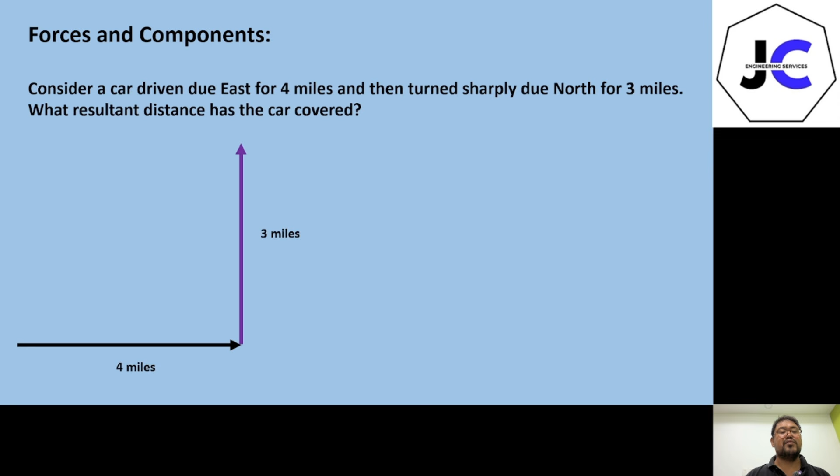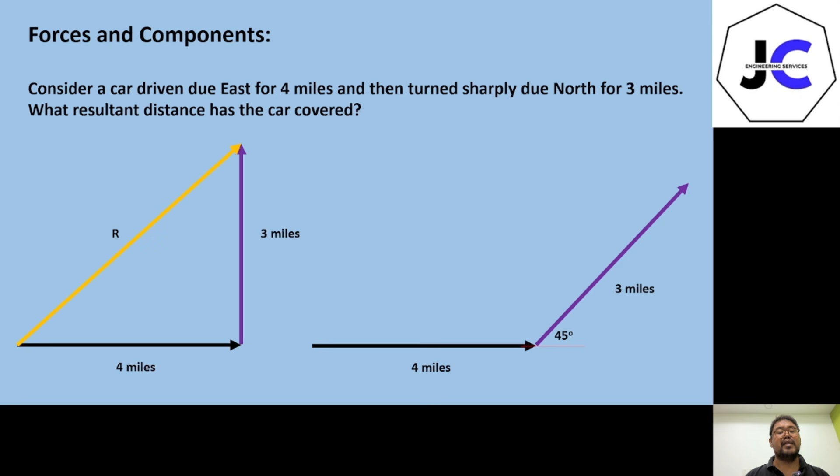So the resultant, like in the previous module, is simply the sum of the two vectors. So we have R. If our 3 miles is not purely directed north or upward, then that becomes our resultant, let's say 45 degrees with respect to the horizontal. So that becomes our resultant.

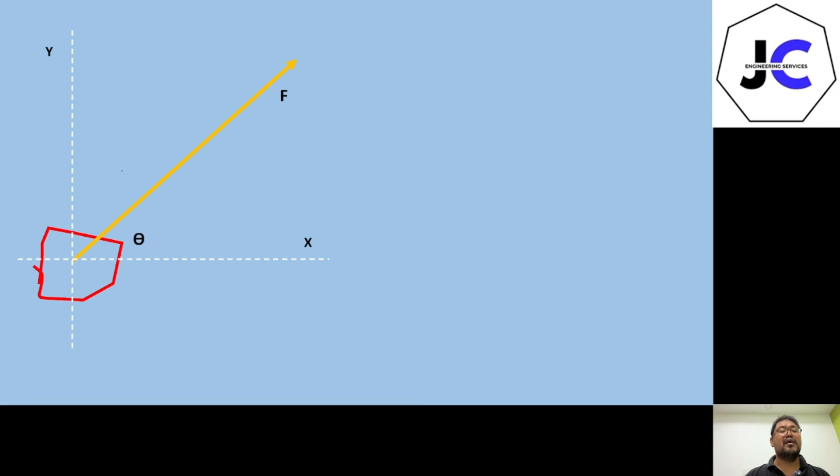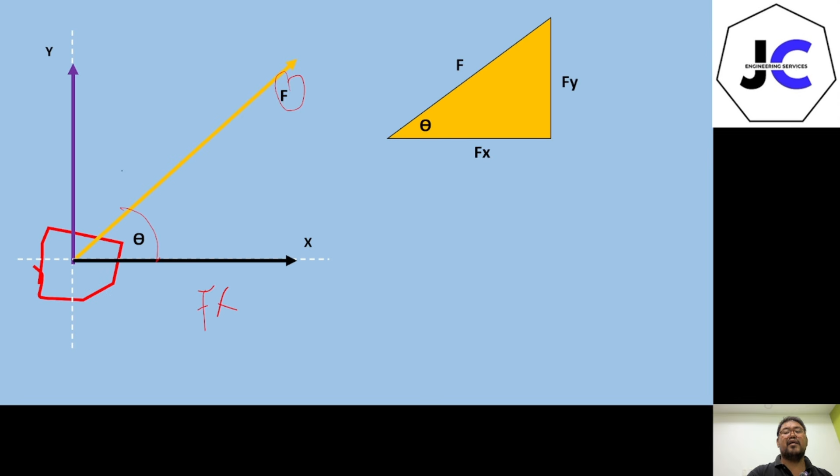Next, you have your body, this is your resultant F. This is your resultant, this is your angle. The purple line and this one are your components, so we're going to call this F sub X and F sub Y. If we form the yellow triangle, we can see it here.

Since it's a right triangle, sine theta equals F sub Y over F, opposite over hypotenuse, and by cross multiplying, F sub Y equals F sine theta. For F sub X, cosine theta equals F sub X over F, cross multiply, we have F cosine theta.

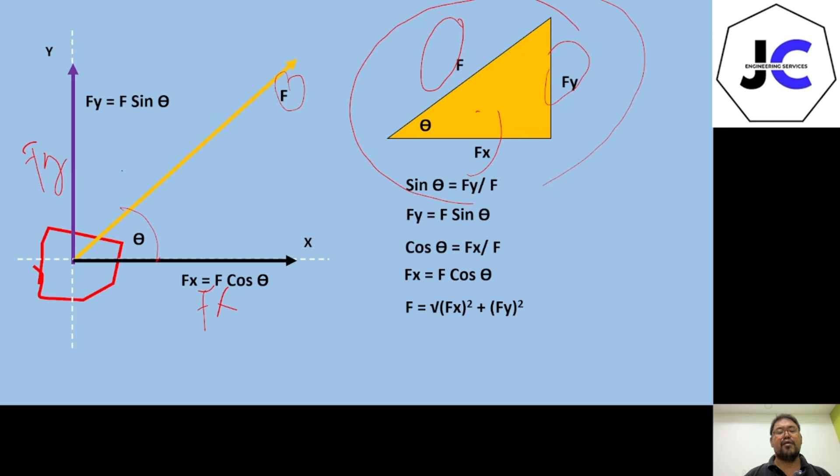Then for F, we're going to solve this since it's a right triangle, using the Pythagorean theorem. So we have square root of Fx squared plus Fy squared. Then for the angle, we have tangent theta equals F sub Y over F sub X.

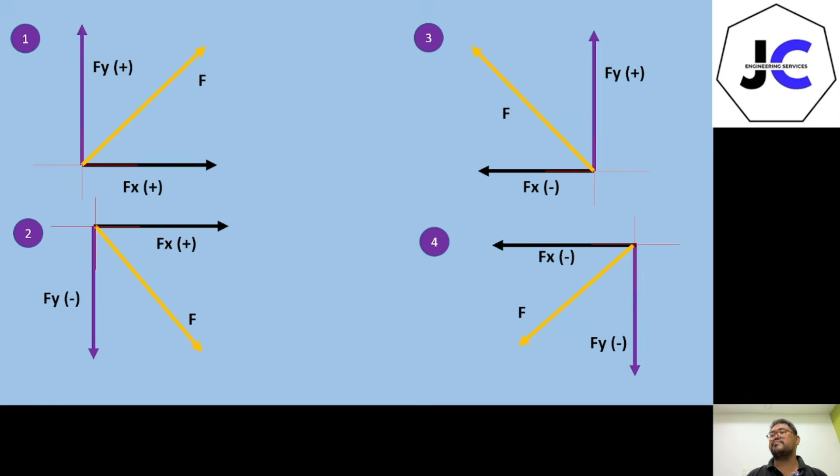Number 2, find the components of 300 pounds. This time, the angle is not given, but the slope is given. If the angle is not given and the slope is given, we're going to solve this using ratio and proportion. So by Pythagorean theorem, that is square root of 2 squared plus 3 squared, which is square root of 13.

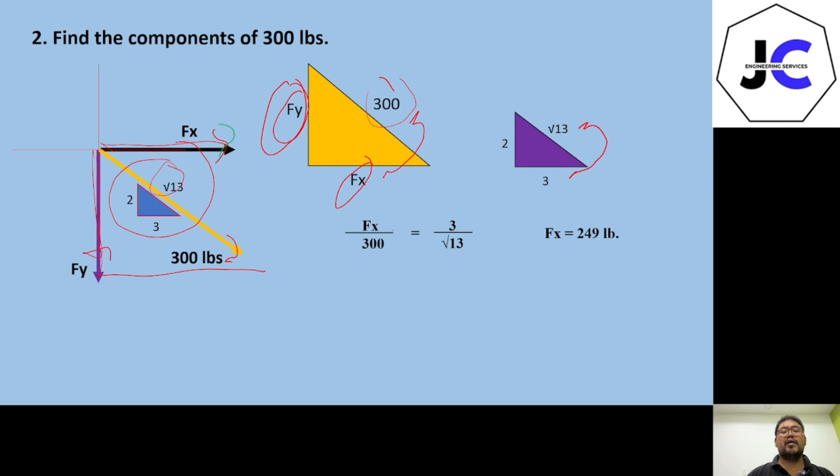This one is positive, going to the right. For f sub y, we have f sub y over 300 equals 2 over square root of 13. The sign is negative because f sub y is going down. So we get negative 166 pounds. So that's the answer.

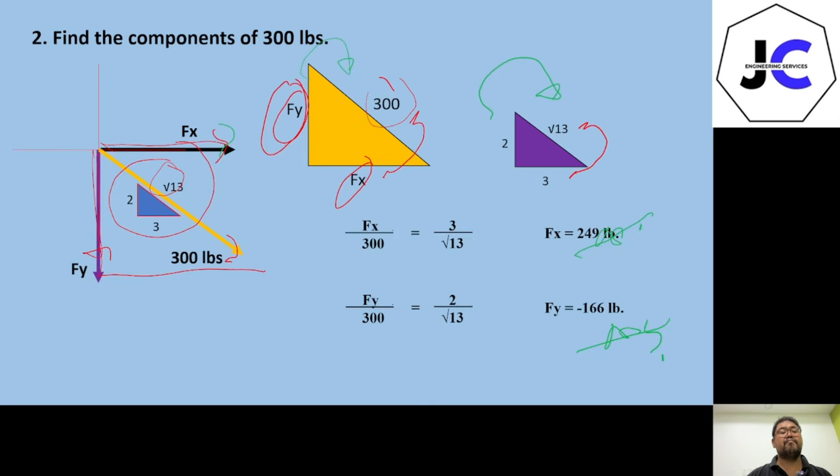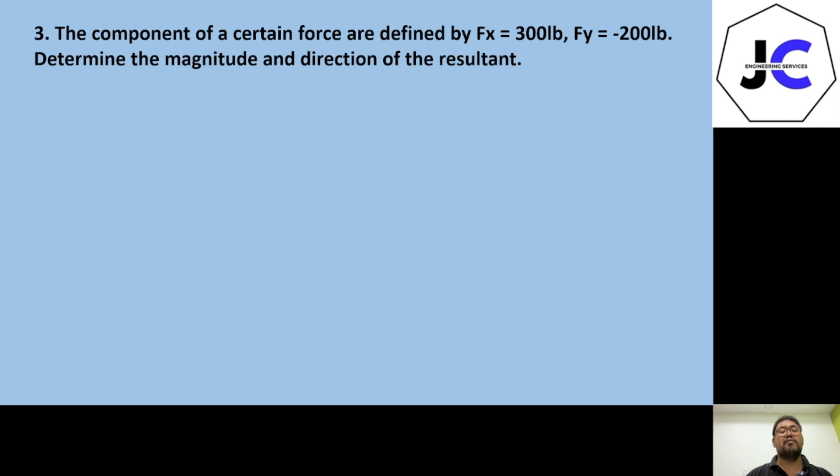Number 3. We have the components of a certain force defined by f sub x equals 300 pounds, f sub y equals minus 200 pounds. You are asked to determine the magnitude and direction of the resultant.

So magnitude and direction. We draw this with 300 and 200, then the angle. For R, we solve using Pythagorean theorem: square root of 300 squared plus 200 squared, giving us 361 pounds for the magnitude. For the direction, tangent theta equals 200 over 300, opposite over adjacent, so theta equals 33.69 degrees. So the resultant is 361 pounds at 33.69 degrees with respect to the horizontal. That answers number 3.

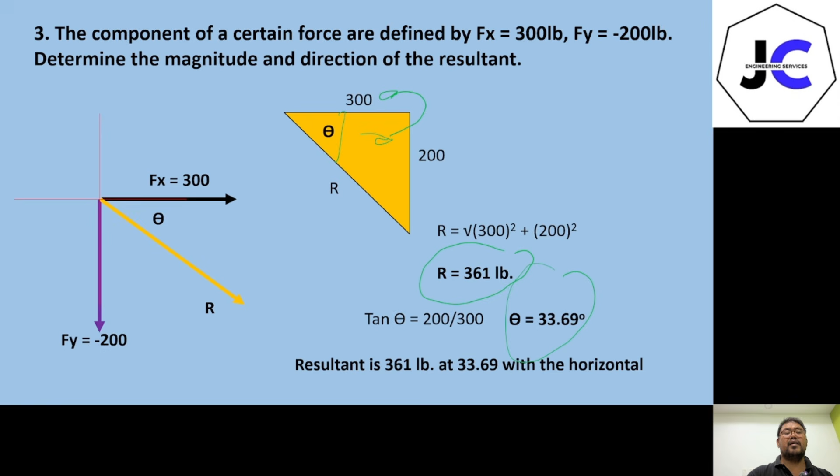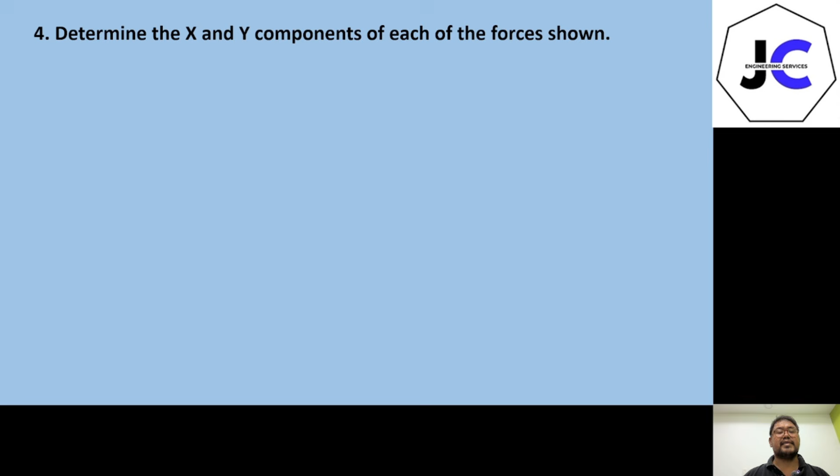Number 4, you're asked to determine the x and y components of each of the forces shown. You see there are three forces: F, P, and T. First, F. F is 390 pounds, the resultant, with components f sub x and f sub y. The slope is 5, 12, 13 by Pythagorean theorem, that is square root of 12 squared plus 5 squared.

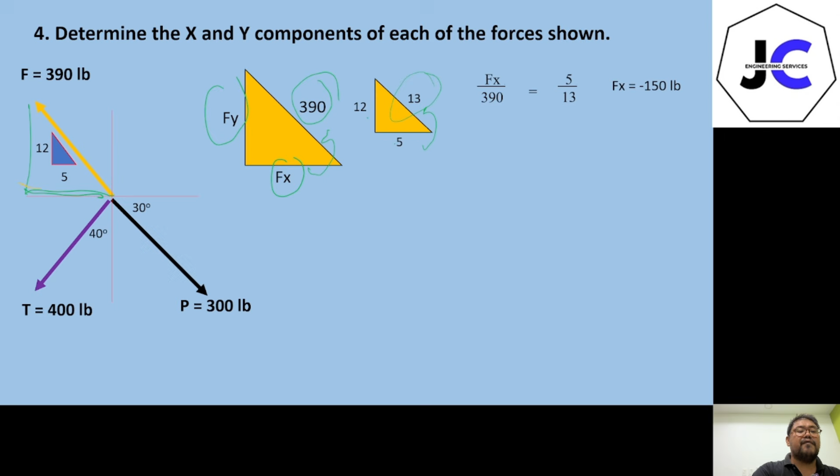Again, from the previous example, if the slope is given like this, we solve using ratio and proportion. So f sub x over 390 equals 5 over 13, giving us minus 150 pounds, minus because the component of F is going to the left. F sub y is going up, so f sub y is positive. F sub y over 390 equals 12 over 13, so f sub y is 360 pounds.

Next, solving for T. For T, the resultant is 400 pounds. Now for the components, f sub x is negative going to the left, and f sub y is negative going down. For this one, the angle is given.

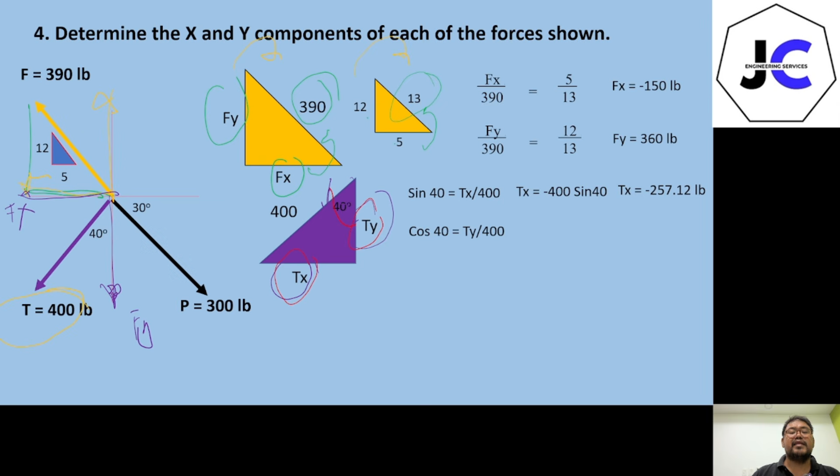The opposite side of the 40 degree angle is T sub X, so sine; the adjacent side is T sub Y, so cosine. So sine 40 equals T sub X over 400, giving T sub X equals minus 400 sine 40, or minus 257.12 pounds, negative going to the left. For T sub Y, cosine 40 equals T sub Y over 400, so T sub Y equals 400 cosine 40, negative going down, giving minus 306.42 pounds.

Now for P, we have P sub X and P sub Y. P sub Y is negative, P sub X is positive. So sine 30 equals P sub Y over 300, or P sub Y equals 300 sine 30. P sub Y is negative, so that's minus 150 pounds. Cosine 30 equals P sub X over 300, so P sub X equals 300 cosine 30, which is 259.81 pounds, positive.

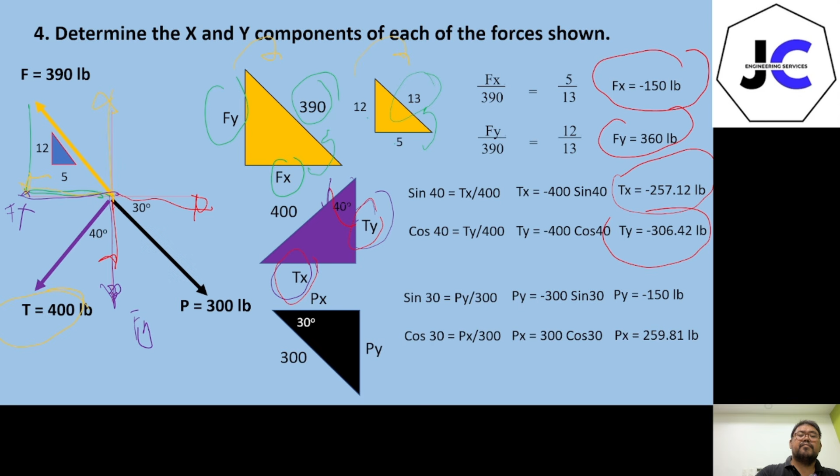Positive because it's going to the right. So that answers it. Okay, so those are your answers.